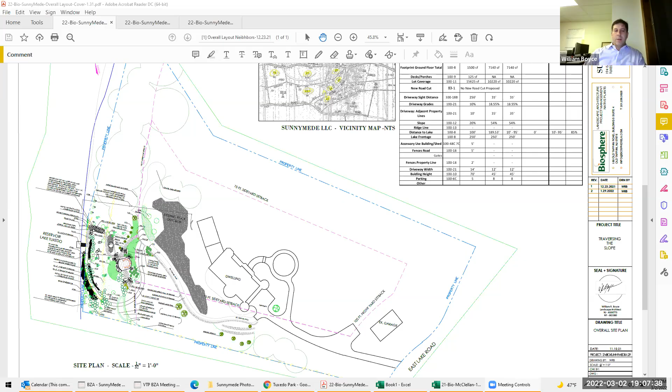I'm a landscape architect working with the applicant. When I was first introduced to the project, the impetus for it was to create a place for the family to get down to the water and experience it in a way that was different from what was there. I was happy to accommodate that goal.

As you know, the site was recently purchased by a new owner. Prior to that, the site was denuded. I heard from neighbors and people in the community feeling as though it was strip mined. I heard that term, I heard denuded - all those pretty much apply. Since the new owner has been there, they've worked to remedy some of those situations. However, there is still one big scar on the landscape, or maybe a few that need attending to.

One in particular is the gravel pathway that extends within the riparian buffer all the way down to their dock - that's where I'm pointing now. The objective is to provide access to the homeowners in a way that's safer. That's a kind of gravelly slope that doesn't feel comfortable walking on, while simultaneously restoring the riparian buffer, which is very important to water quality within Lake Tuxedo.

There's a few strategies we'd like to use to accomplish that. One would be to remove all of that gravel and loose aggregate that's in the area and very erosive. Two would be to pull back and make the existing riprap in that area less linear so that it fits the visual mosaic of what is there, and then plant lots and lots of plants.

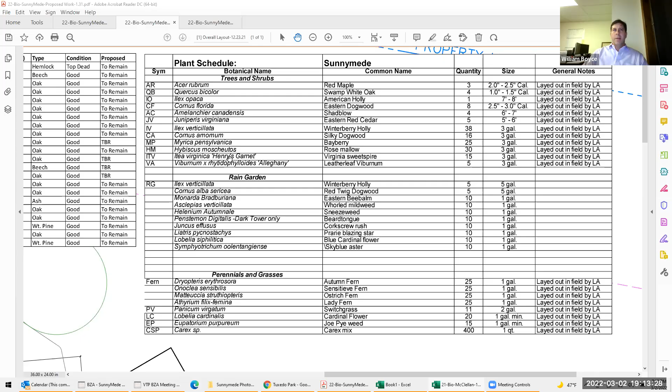And then throughout the riparian buffer, there are another 546 smaller ferns, switchgrass, cardinal flower, Joe Pye weed, and carex. They're all native. They all will work beautifully within what's there now, woven into the existing plant material.

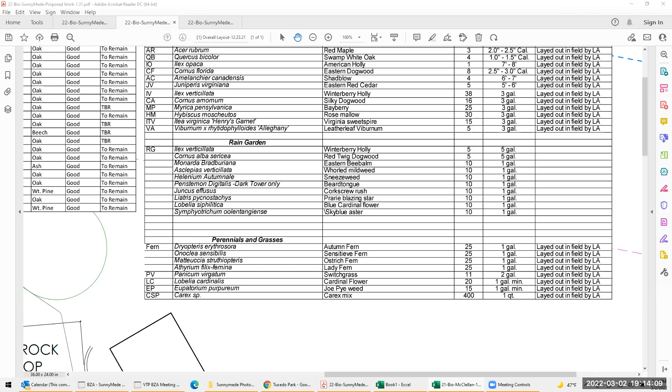The moss that's there now, we would not be interrupting any of that, only adding to it in small pockets by hand, so as to increase the biodiversity within that buffer, which will filter the water. Right now, if I could bring a photograph in, I could show you what the site conditions look like firsthand.

Just please bear with me. I want to grab the correct photograph.

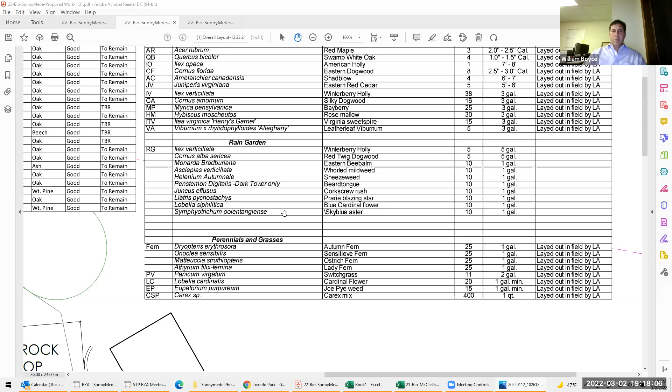Let's see, I'm going to zoom out a little bit so we can see more of the plan, and then I'll open it up to everybody.

Of course, we would be using erosion control measures to make sure the water is protected during the course of the work, and can even retain those measures as long as necessary until we know erosion is not going to happen. There's tree planting details and landscape restoration notes.

This is the actual plan itself. Oops, too big, I want to make it smaller. There are far fewer trees being removed in our revised drawings than there had been in the previous submission.

Now we're only looking to provide a small view out from this area of the lake so we can enjoy it.

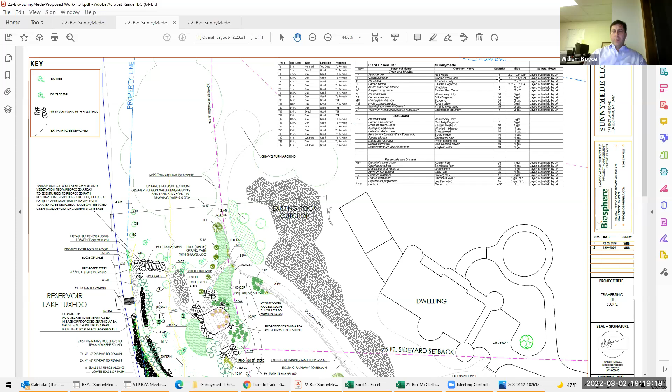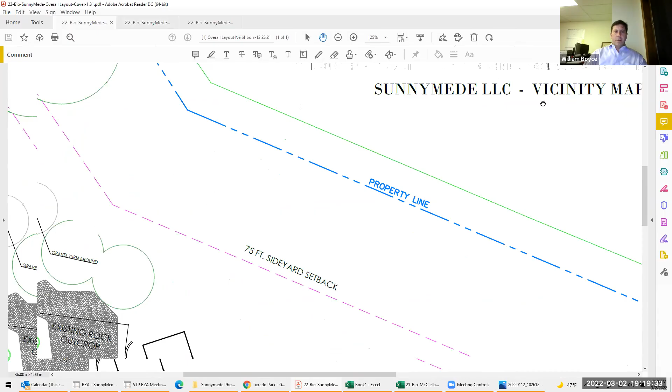Additionally, those trees that would be lost would be compensated for by our 154-some-odd native plants that would include oaks, because we do know how important oaks are. Your board pointed that out, and we're respectful of that. We want to definitely accommodate the needs of the board and nature. And I agree, oaks are amazing and very important. As a landscape architect, that's what I do.

That concludes my initial presentation. I'm sure there will be questions, so I leave it to the board to further the conversation. Elise, we should open it up to the public at this point.

Yes, you can open it to the public, or you can open it to your board and then open it to the public. Why don't we have the board at least ask a couple questions at this point, and then we'll open it up to the public.

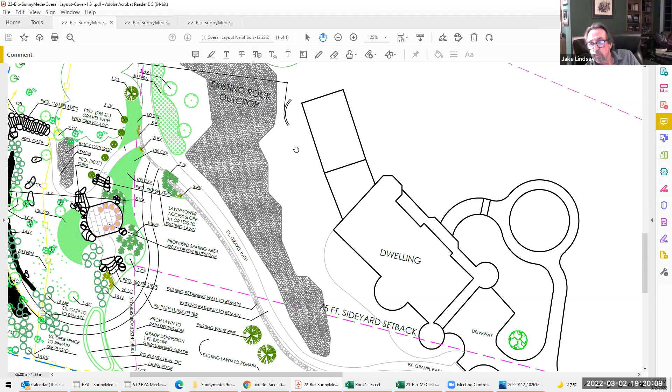Bill, William, one of the... you have the note here about the riprap to remain, which is actually very unsightly at this point, along the lakeside. Yeah, in testimony I said we would be mixing that up and kind of pulling it out. We're not opposed to pulling it out.

I just don't want to do more damage to the plants that are kind of restoring themselves in and around that. I'm sure there's a pretty careful way where we can fix that, but I don't want to create an erosive condition on that steep slope.

We do have 546 perennials to plant in that area, so as we take out the pathway, my vision was to pull some of that riprap around, and I can renote that. Right, because right now, quite frankly, when you look at it from the lake, it looks like a wall. Yeah, again, we don't want that. That's something I want to fix.

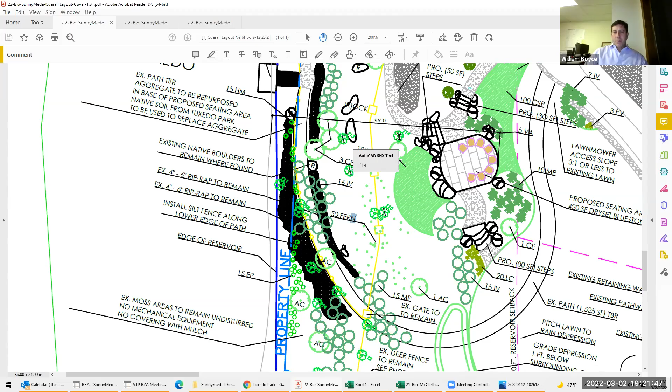I guess you should maybe just point out the trees you are looking to remove and the size of them for everybody's benefit. I'll do that - the trees with the X's, such as this one, this one, this one, and then I'll refer to the list. Okay, there's four.

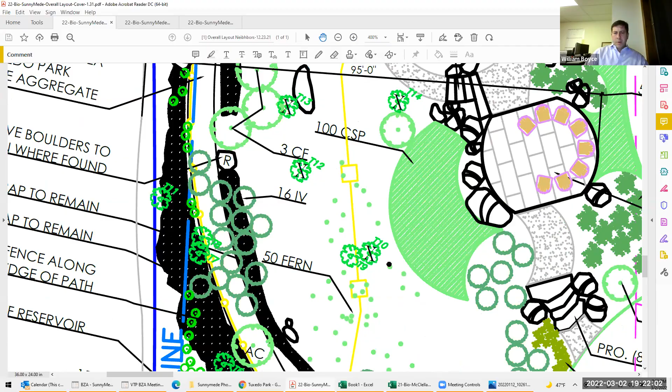They're right here in the middle - 1, 2, 3, 4. Those are noted as T10, T12, T14, and where did the other one go? T13. So T10, 12, 13, and 14. I can refer to the existing tree schedule to point those out.

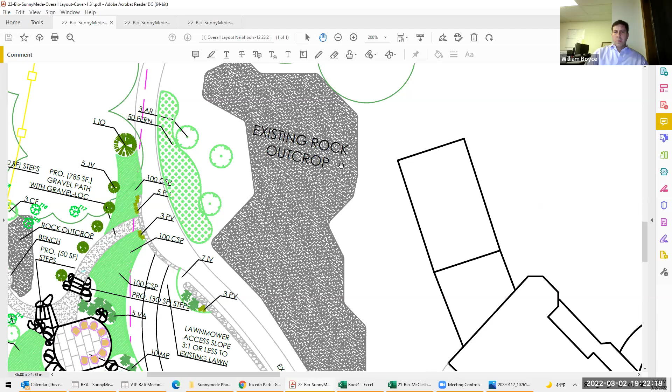Can you also pull the photo that shows those trees? I will be happy to do that. I think my tree schedule is on my other plan.

So T10 is a 14-inch oak. T12 is a 14-inch oak. T13 is a 13-inch beech. T14 is a 19-inch oak.

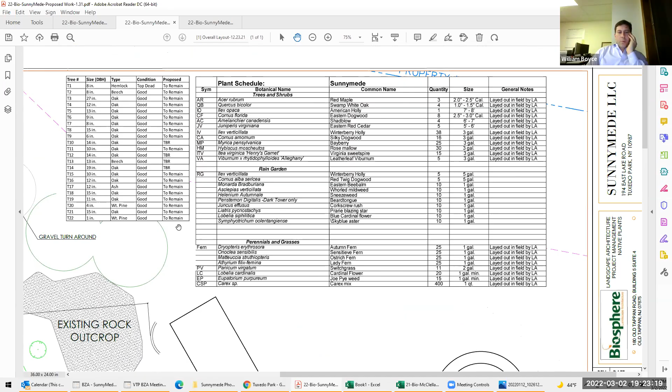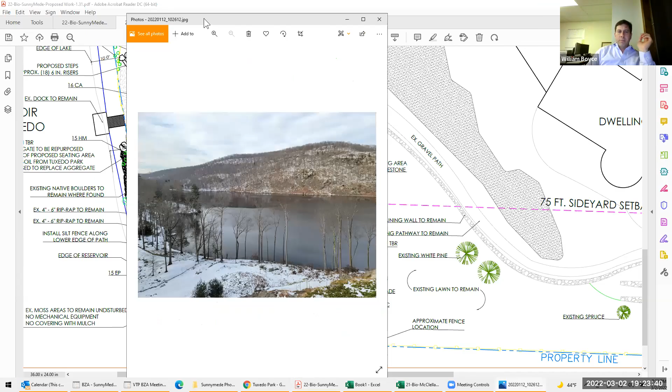Okay, so now I can show you the photograph to illustrate that. I want to expand it. There we go - those trees are right in this area here. So remaining would be all the trees along here, and then all of these trees here. So it's really these 4 right here. And then again, there would be an understory shrub and tree layer complementing the balance of the site.

The other question I have is the existing path that comes down from the home, your existing gravel path - a lot of that falls outside of the 100-foot setback. I guess that's part of it that's in there right now, correct? Yeah, this path falls entirely outside of the setback. In fact, if you can see where my cursor is, right around here, this is all disturbed land, which my plan doesn't really capture accurately.

Yeah, that's exactly what my question was going to be. Quite frankly, I think if we're looking to restore, that area would need to be addressed also.

Yeah, if it's okay, I'll switch back to my plan and try to show you where that is in 2D. I have 3 screens and I'm using all of them right now, so bear with me, I'm doing my best. That area is right around here, if you can see where my cursor is.

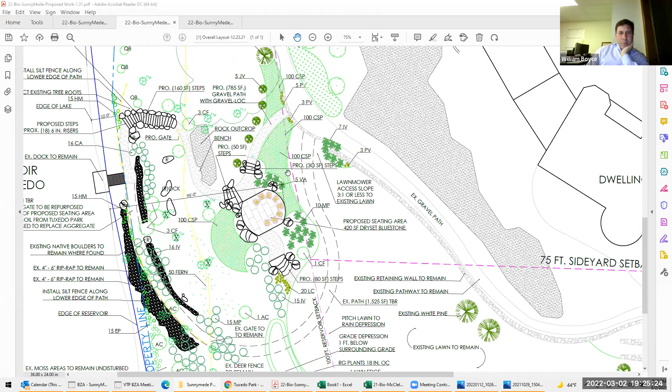So our intention with that area is to come down the gravel path, which we're looking to secure, and that again is outside of the buffer. The buffer is this magenta line. Eliminate this cinder path that goes around, outside the buffer and then in the buffer, and add a lawn within this space here.

And then that lawn would be non-erosive. These are carex pennsylvanica, all native, low-growing plants. They're like small grasses that are semi-evergreen. They would be through there. And then Juniperus virginiana, which is native juniper - it's the tree form of a juniper, and they attract wildlife and are great for the environment all around.

So yes, we would be restoring that area that's in the photograph, and then the area also that would be outside the 100-foot too, where you have the note 'lawnmower access slope 1 on 3 or less.' That area where that note is is also a very visually bad area.

Yes, I think this picture kind of hints at that. We have our friend the Japanese knotweed here, so that needs to be removed. This rock would stay, but really from this rock wrapping all the way around, all of that would be improved and planted - it would either be lawn or plants. I have plants along the edge.

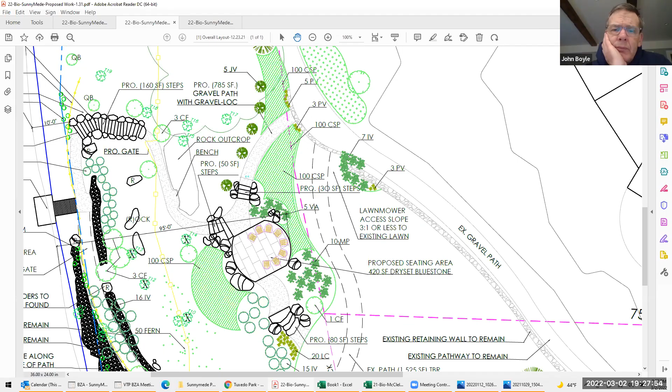I guess the question I have is where you currently have the note 'lawnmower access slope' - is that all currently just a rock outcropping, or is there an ability to add vegetation there as well? Yeah, there's just one big rock there, right here.

Right in this area? Actually to the right of that. Above the path - right in this area? Keep going to your right. This area in here? It's all kind of barren and looks like a strip mine. Yeah, actually I have addressed that to some extent - I'll show you where I have 50 ferns going in there, kind of in and around.

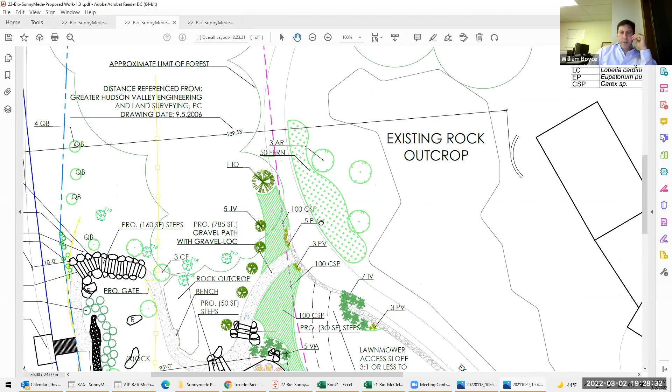Below that, you see where it says lawnmower access? Right here, keep going down. Yeah, that area in there, is that all rock, or is there an ability to add vegetation in there as well? Sorry, I just had a visitor. Yes, whatever is not lawn would be plants, and that whole area is intended to be restored.

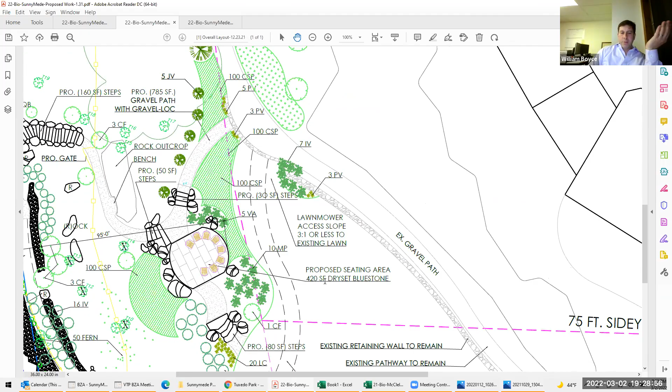Okay, well that should be shown on the drawing then also. Yeah, that's not a problem - that's existing lawn to remain. I can just put a note: existing terrible lawn to be improved, or something of that nature.

Before we give it to the public, this should have had a topo to go along with it. Do you have the topo? Because you're pretty steep access here, and when you look at it, it's hard to tell whether some of the steps are going up or down, or what the percentage of slope is in those particular areas.

I agree, I would have loved to have had the benefit of a topo on it. I've been a design build firm for 25 years, and in my experience oftentimes we don't have topo. All of these risers are 6 inches, and I can pull a string level from here and do it based on spot elevations. I really just want to weave it into the existing slope, and I know that won't be a problem for us.

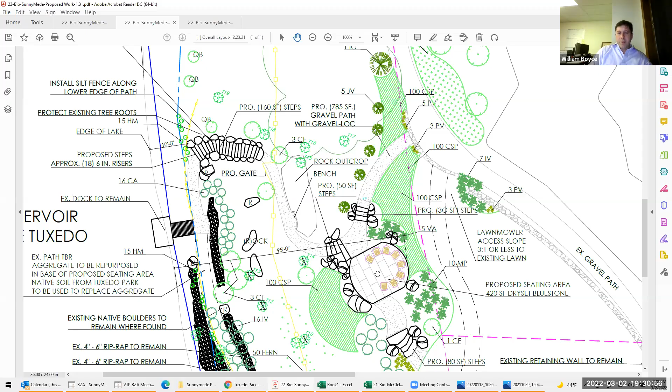So I understand, but we're kind of novices sometimes, and we really need to see where the slopes are. I understand.

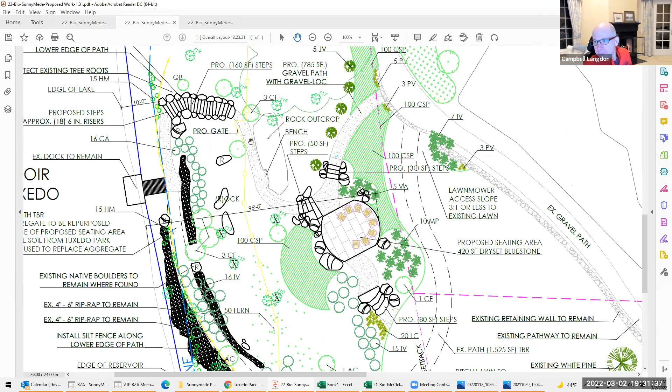It's a horrible color and I did a terrible job illustrating this, but this proposed gate is in yellow. When I draw, for the board's edification, my whole screen is black, so yellow really stands out against the black and white. I apologize for that, and then it says here the existing gate to remain.

That was just during the course of the work. I can easily just show that to be a small gate, but I think we would prefer to have access here to maintain this, and access here as well. It'll be much more convenient to get in there. Not that we're planning on funneling people through, but to maintain the plants would be helpful. I think their neighbor may also have a gate over here, which I believe they're friends, so it might help.

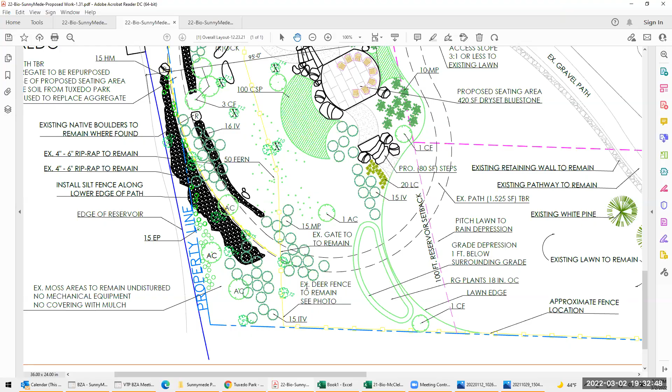Jake, do you think it'd be helpful to show that photo that you had? I sent it over to John. Could John show it? Yes, I can. Because that kind of gives you a sense of the elevation, I think.

Can you blow it up, John? What section do you want to look at? Just have it be the whole screen. Even if you just get the whole screen, right now you've got your downloads on it. Is that what you see? Yeah, I see half a picture and then the downloads. Hold on a second, let me see if I can open it first.

Where is it? Nice sweatshirt, John. Well, we coordinate, we'll have to call each other again to get a different sweatshirt next time. That better? Yeah, you got it. Much better, there you go.

Maybe William, you can just point out where the patio is going and where that barrier is. I wish I had that ability. Can you? How do we do this? Because John shared his screen, he's got control of it, I guess. William, can you see my cursor? I can, yeah. Okay, all right.

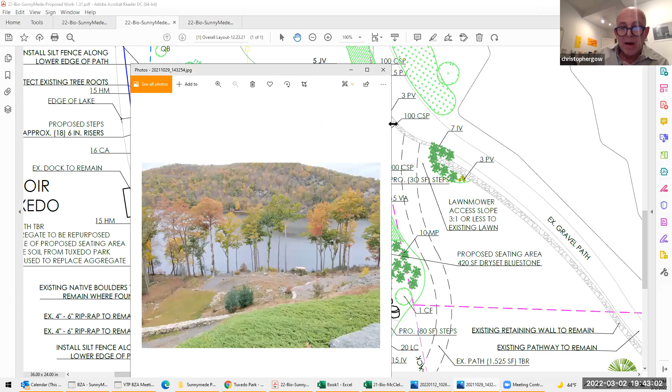From an aesthetic point of view, if we're not looking from the McClellan's side, but looking at the McClellan's from the lake, here's an analogy. It would be, I don't know, as if you're going to a ball and you've got your beautiful diamonds, your earrings and necklace and all your family jewels, and you forgot to put your tiara on, or you've thrown the tiara out. That beautiful canopy of trees above you would be missing. So there's this sort of platform, like the top of an Aztec ziggurat.

You'll be sitting completely exposed to all of us on the lake, yourself completely exposed to the sun, because you won't be sitting there when it's not sunny, and those trees will be providing you lovely shade. Otherwise it's going to get very hot there. So I really, really would implore that you keep those trees, especially the 19-inch oak tree, the T14 tree, which is quite near the patio, and that would be the one that would provide you with some shade.

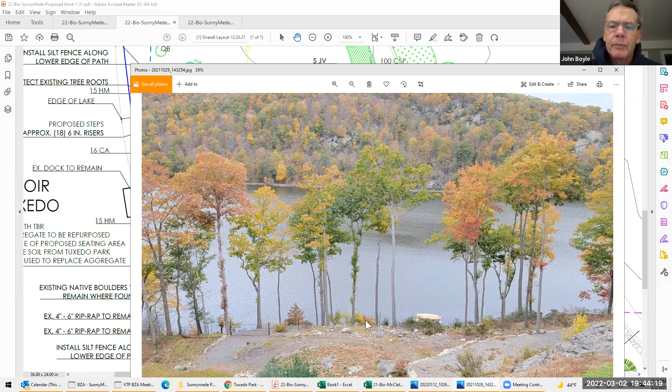Could you point out to me again which 4 trees we're talking about, William, please? On the plan view or this photo? Right, we're looking at right now. Yeah, these 4 here. Okay.

So if we analyze these 4 trees, and Christopher, thank you for that, I do appreciate it, and I do appreciate trees as well, as we all know. These 4 in particular, this one's displaying suckering branching, as Mr. Gow indicated, they have been stripped of their lower branches.

Of course, the loss of any tree is not necessarily the greatest thing, but I know the applicant has made it clear that they really, really like the water, and they are restoring the whole ground plane with copious other plants, all native, really looking to create more of a layered effect and feel as though that would be compensation. I think the shade they would be benefiting from those trees might hit at a certain time of day, but I think most of the day, given the elevated canopy, it's not going to be as wonderful as we would love.

I know that the last time we presented, I think there were 10 or 11 trees to be removed, but after really analyzing what the owner wants, they really want an uninterrupted view of the lake from that one spot. So we worked with them to refine the expectation there, and it's hard to keep those trees in that spot because they just see more water in a contiguous view. That's the position I'm in.

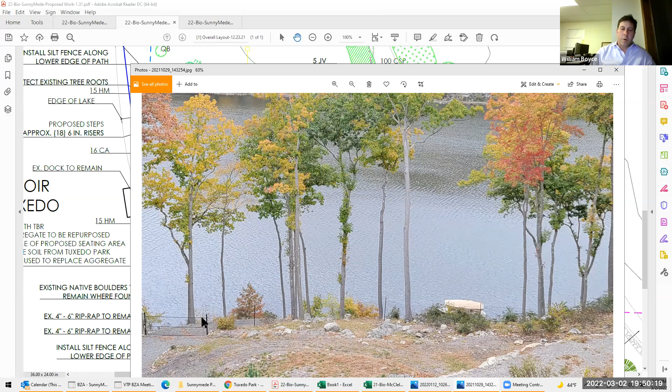I do also know that lawns have a high runoff coefficient, especially if it's compacted soil below the grass. But in restoring the site, we would make sure that the upper layer, the O horizon of soil, would have lots of organic matter in it. It would be spongy because then we wouldn't have to water it every day. And that too would absorb as much water as possible for lawn to absorb. Our view is that the rain garden depression would capture additional runoff that was flowing into the restored area. It was our intent to do that based on comments we had received from the Architectural Review Board. And so that would further enhance it. And it kind of works as a funnel because everything goes in that direction as it is.

In that direction, we would plant lots of plants. I think there were 90 perennials in there and woodies that would suck up all the water before it got to the reservoir. Furthermore, we're not increasing any lawn, we're actually probably maintaining about the same. And what is not lawn now is erosive gravel and small particles like cinder. So that would be removed, which is, as you pointed out, very erosive. So I think our application is extremely sensitive to the nature and to restoring and enhancing the buffer. And I do appreciate no more lawns. In fact, I'm known for taking out lawns and adding meadows, and that's what we want to do here as well, hence all the plants. Thank you.

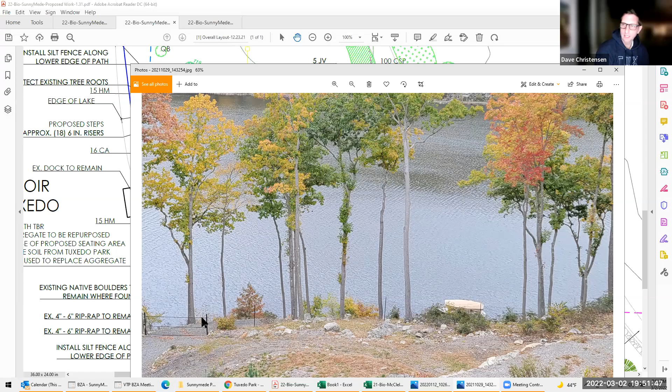John, I have a question on the code. So the code says construction proposed within 100 feet of Tuxedo Lake. Is there a definition of construction in the code? My interpretation, and I would love maybe Mr. Ledwith to refine my interpretation of it, is that it's very vague and it just refers to all construction.

When we first endeavored to do this, we noticed there were a lot of neighbors with dry set construction right along the water, and I have many pictures of that construction. A lot of it's dry set. So I figured since there's no permanent foundation, it's literally rocks sitting on the soil, it would be permissible because it's not permanent. Having done this for a while, I figured that would be the least invasive type of patio we could make.

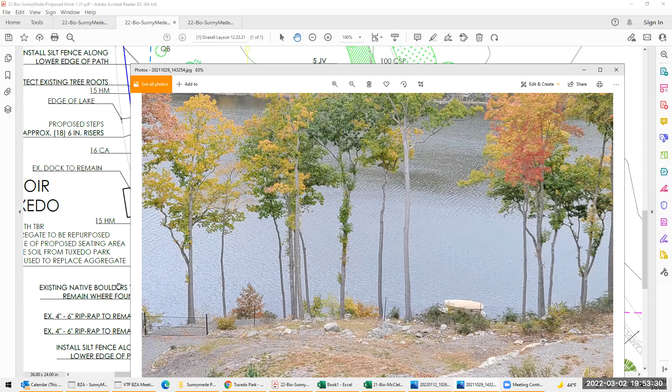I was asking John Ledwith actually, but thanks, William. John, you've mentioned previous meetings about doing something at grade, it doesn't need the same type of variance. Is that correct? Yes, this is construction activity, in my interpretation, within 100 feet of the reservoir. There's also terrain alteration, and it would require a variance within 100 feet of the lake. I do understand the code may be vague in certain points, but I think the code's main prerogative really is to protect the environment and protect the neighbors from activity.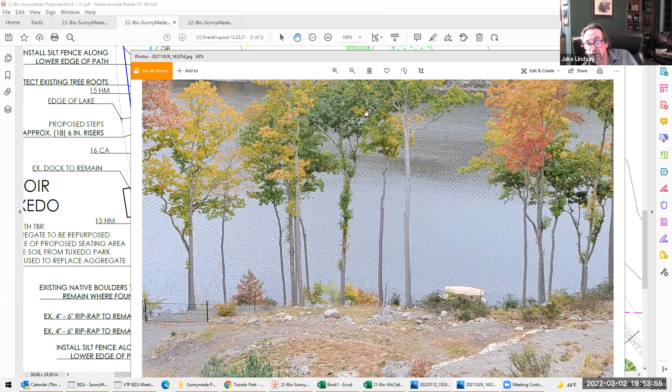Mr. Chairman, may I ask a question? How far from the lake is the patio? What's the closest point of the patio? Well, they don't show that, but obviously the steps would be the closest construction, and that's showing at 10 feet. I would just suggest that they add a measurement from where they want to put the patio as well. Right, they show 10 feet for the start of the steps and the stones around the steps, and they probably should show what the patio is also.

I mean, that's a fairly flat area. It's not natural, so I would think the zoning board would want to consider where it actually is. That's one of the reasons I think we really do need a topo before we finalize things. If you look at the existing property right now, it's just a flat area that has nothing on it. It's eroding, it looks like garbage, and all they're doing is putting stone on top of it. You may consider that construction, but it's just papering over an existing flat area. In fact, it'll be less erosive having this patio than it would where it exists now.

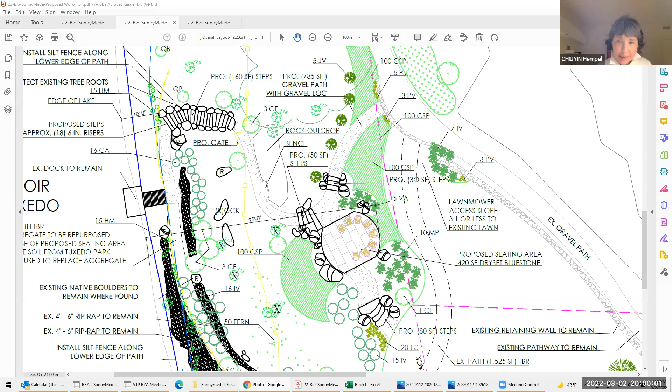To this last point, I'd like to make a distinction between landscaping and construction. I'm delighted that Mr. Boyce and the owner are thinking of planting all those wonderful trees and shrubs and taking remedial measures about that badly constructed path. But the patio is an artificial construct. That to me is construction.

In the absence of definitive statements in Tuxedo Park's law about building within 100 feet of a reservoir, I would hope that the BZA can look very closely at that particular part of the proposal, the patio, because that is construction, that is a structure, that creates more impermeable surface. Even though in the BAR presentation Mr. Boyce said he's going to make it as pervious as possible, and there will be a rain garden and so on.

But I'd like to suggest thinking about the precedent. Mr. Boyce and the Sunnymede owner are environmentally sensitive, but we can't guarantee that everyone else following will be. That's all I have to say. Thank you.

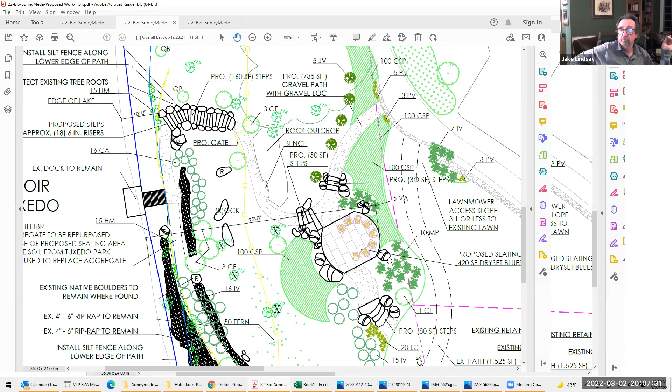So, Jake, where do we go from here in terms of... well, are there any other public comments at this point? I assume not.

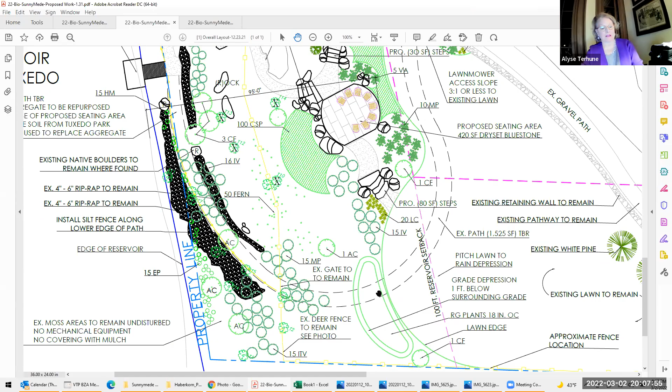Alyse, are you still here, Alyse? Of course. Okay, you weren't coming up on the screen. Yeah, I'm here. I think, Mr. Chairman, if you are going to ask for additional materials from the applicant, you may wish to keep the public hearing open. Do you want to speak?

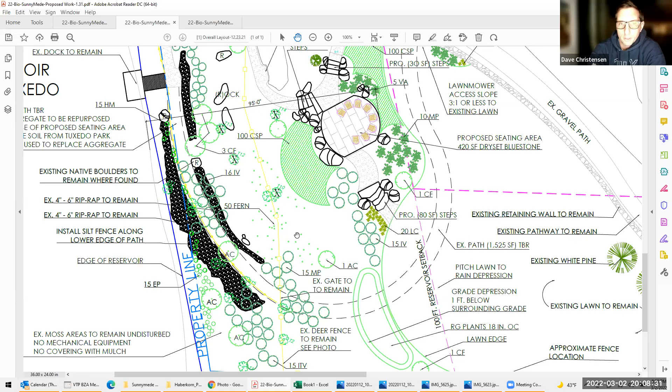Okay, I'd like to make a comment. I appreciate all the environmental concerns, but I do have to agree with the applicant that this is a major improvement to the area. I don't feel that a 420 square foot patio is going to alter the ecology of the lake, the way it's being constructed. I don't think it's going to be an impactful structure. I like this plan much better than the previous one that was put forward. I think they put a lot of effort into it.

Yeah, I would also agree with that. Even with the patio, it's likely to be more environmentally sound than the existing condition today. So it's not just an improvement from a visual perspective, it's an environmental improvement as submitted versus the existing condition today.

Also, Jake, maybe you can clarify this in terms of what our charter really is here as the BZA, as sort of the way I read it. We're approving the steps that they're looking to add, right? And we're approving the patio or not, but what's lawn or not is not in the purview of this board, is that correct? Well, the only consideration is that if we're going to approve construction within the 100-foot setback, we need to take a look at the whole project, and what is its effect in the 100-foot setback.

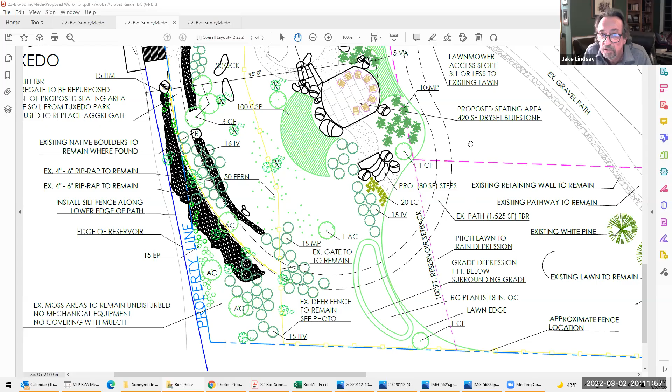Up where the path is, and then to the right of that, where right now the start of your path is, off of your existing gravel path—no, the one that you're removing—there should be similar plantings in that area up to that wall.

And I would like to see a topo, and I would like you to consider saving some of those trees, because you're going to need a big piece of equipment to go down and cut that tree down, and then you're going to need to take out the roots, unless you're going to stump grind it. Actually, if we did take out the trees, I would leave the roots because they'll hold the slope all together. So you would stump grind it then?

Yeah, it wouldn't be an eyesore from the reservoir at all. At most it would be stump ground, or we would dig around it and flush cut, sacrifice a few chainsaw blades. A stump—horrible to hear that—but grinding the stump would be easier and less disruptive. Okay. Yeah, I would prefer to leave the roots in place and stump grind, as you're suggesting.

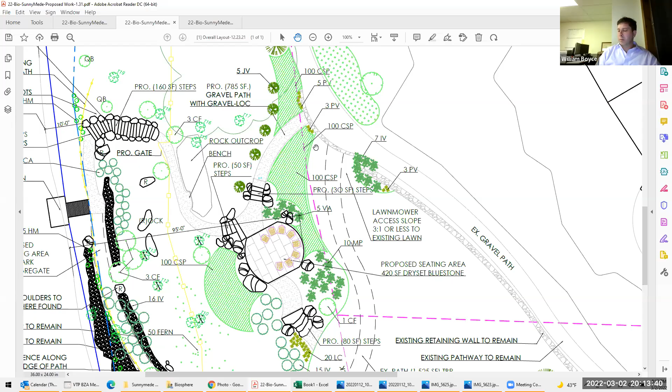I'll just make a comment. With this project, the least disturbance possible—it's already a compromised site, so the least disturbance possible. So removing roots and that sort of thing is just a terrible thing. There is another option as well: a dead tree is called a snag, and some dead trees are more useful than live trees as far as wildlife is concerned.

And so for the McClellans to enjoy this garden, the more trees there are, the more birds there will be, and the more songbirds there'll be. That'll be a wonderful thing to hear as well, as far as the acoustics and aesthetics are concerned.

The other point I wanted to make was, yes, to make an exception for building within this 100 feet, something significant has to give in order to make this an exception. Yes, a small patio is not going to make much difference—it's the principle that's being made here, that we're changing the rule for something. So I appreciate the McClellans and Mr. Boyce putting together this environmentally sound thing.

Because that is the most fundamental thing. The aesthetics are important, but the environmental aspect is the huge deal here, because we don't want a chain link fence put around our reservoir, because too many projects like this have happened by the lakeside, and the DEC sees that we're compromising our drinking water. So it's great that the McClellans are making environmental leaps in the right direction, so there has to be a net gain in this, and there has to be a good example to make up for all the other neighbors that got away with it in the past and made our lake look like Greenwood Lake as opposed to Tuxedo Park.

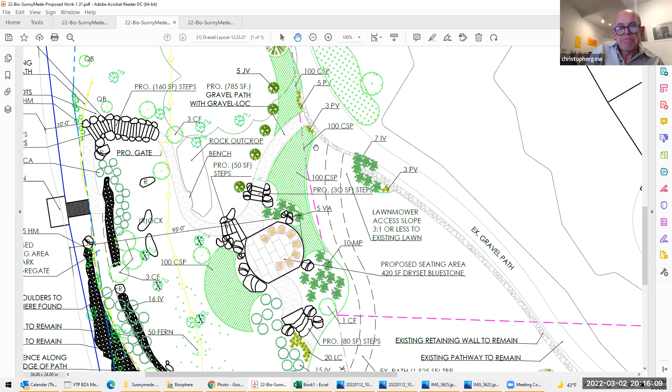This, with the boulders and the steps, is going to look more aesthetically like an Adirondack Lake as opposed to Greenwood Lake. And I think we all agree that's why we're here. So the least suburban it looks, the least messed around with, the better. That's all I wanted to say. Thank you.

I personally would like to see more information and more on the drawings before I would be in a position to vote on it. And I kind of expressed the fact that I think a topo would be required.

I think additional— What? We have one. There was an old topography report done on the property, which is what we used when we submitted for the pool. Okay, but we don't have that in front of us. Well, when we submitted— And it should be, it wasn't requested. Well—

It just seems like a lot of stuff comes up, but I'm requesting it, as far as for us to really review this, and I think the topo should be required. Every other one that I've heard, a month ago when we turned this in. I'm going to look for the topo, and he's going to pull it up. And I don't know how these steps would be worse than somebody putting in a brand new boathouse on the lake.

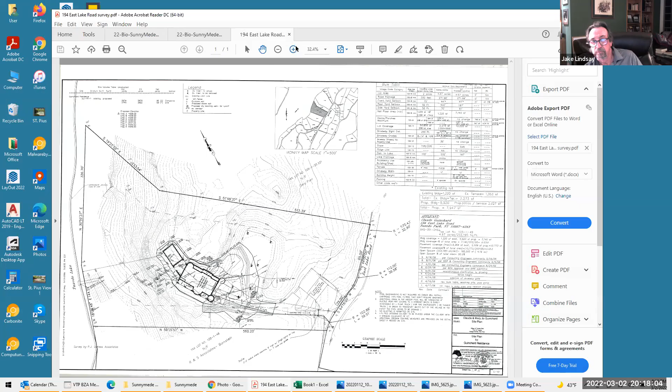Well, a boathouse on the lake, approved. If you're bringing in things, the boathouse is carried over from an old code. People who had a boathouse on their property at a certain point in time are allowed to build a boathouse, it's part of the old code. Thank you, Bill, for pulling this up. As of 2008, right?

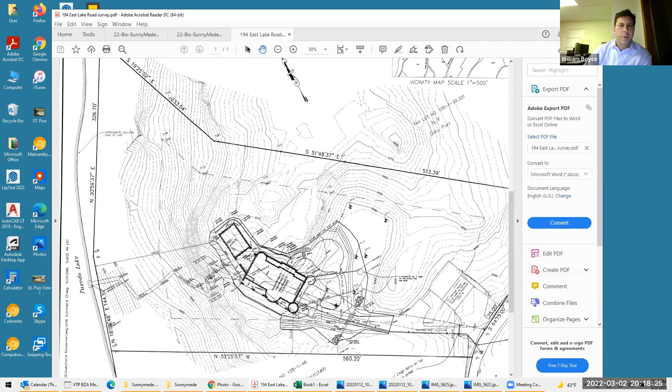Should I check, did somebody see that? This was revised in 2006, I see, but the water elevation probably is the same. Rock outcrops are the same. This is the extent of the topo that we have. Just trying to pan down to... I don't think my computer's happy with me. Okay, that's better. Cliff, that's a cliff. It's steep, the whole thing is steep.

So wherever the contours are close together, it's very steep, as somebody pointed out. So this is really steep. This is where the cliff is up by the house. Since the inception of this plan, there was a road put through here, and I would say the dock is static, that hasn't moved. Has the dock moved? Anyone? No, it has not.

So, no, but honestly, typically the landscape plan should have the topo on it, which shows the location of the patio, shows the location of the stairs, shows where they're coming out. Most of the time we're getting drawings, especially something that needs to be looked at closely, you should have a topo.

Understood. I mean, Bill, you're aware of that. Yeah, I wasn't furnished that information within the area we were working, so thinking that we would be maintaining the existing topography the way it is, with the exception of exactly where we're putting the steps and the patio, which is on the flat area.

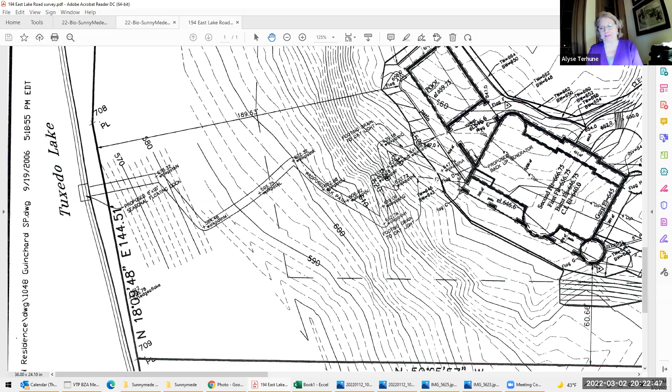So, Jake, does it make sense to have the discussion of the 6 points now, just to see if anything else comes up? We're not voting, we're discussing the points. Other than this topography request and additional planting shown in the other areas, from my perspective, okay - now I'm not sure what other board members feel at this point in time. I'm just trying to find my drawing.

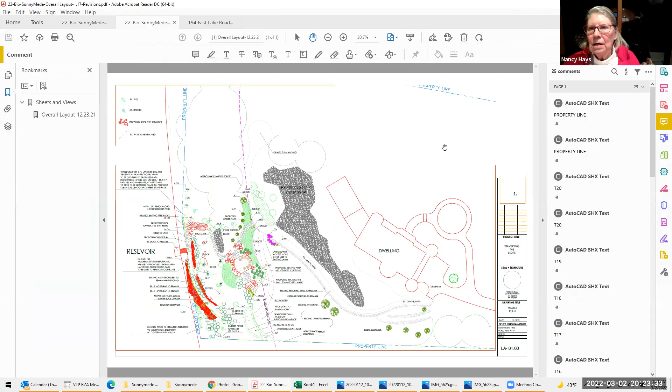I would like to see the topo regarding the stairs, if I can. I was there, I walked it, I'm comfortable with it because I actually saw it, was there, as opposed to seeing something laid out. I'm comfortable. Yeah, I have to agree, I'm comfortable too. I was also at the site today, so I saw it and believe this would be 100% better than the existing site. Well, yes, anything would.

So it sounds like we have 3 members that are supportive. And I would like to see more information. I would like to see the additional plantings and at least spot topography.

I'm pretty quick with AutoCAD. If you could recess for a bathroom break, I can put more plants up there. I'll do it right in front of you. I would just make a point of order here that it is the chairman who calls for the vote.

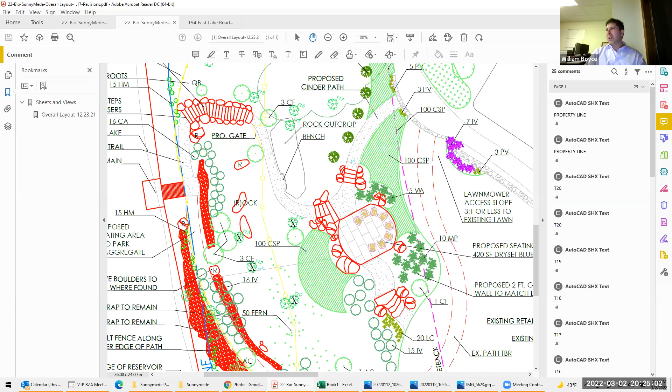Right. Can you put the additional plantings on? Yes, sir. How quick could you do that? I just have to get the right drawing open, if that's okay with the applicant.

Yeah, it's fine. Would you like a sidebar, applicant? I'd whisper to you, but I'm not sure how to do that in this forum. Is it okay if I text you quickly? Yeah, I think you can just chat. Or you could just put it on mute and call her. No, I mean, that would work.

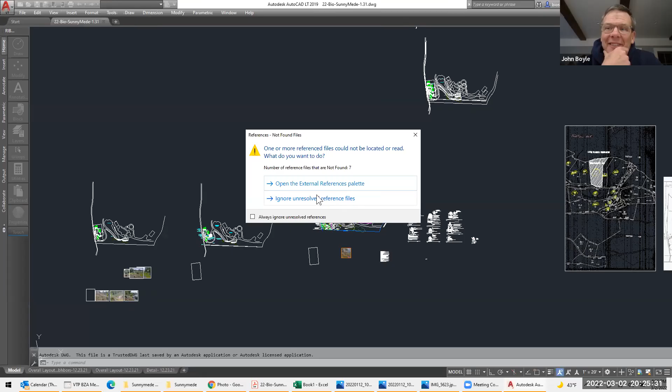Happy to have additional plants. The whole point is the planting down there. My understanding was this meeting was really about the dry laid terrace and the dry laid natural stone. We just need to look at that, not because of the landscaping, but because something is being built in this 100-foot setback, and we need to see the whole concept involved.

And it's all part of it. I mean, obviously, if the fact is that you weren't improving a bad condition, we would probably look at it a little differently. But since we're all tired of looking at it, we can be more agreeable. Yeah.

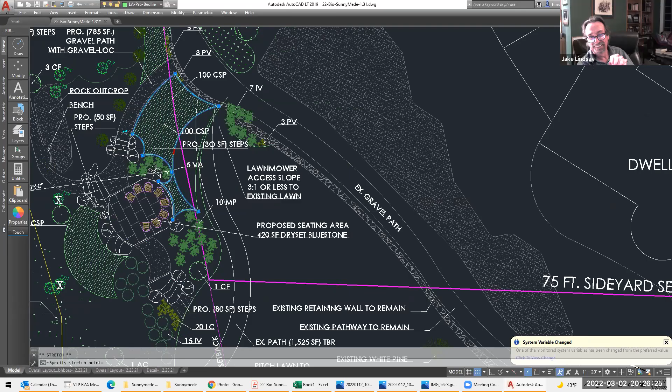Plans? All right, so that's a polyline. I'll change this 100 to 200, raise it to 200 of these Carex. And then go to the area where it says lawnmower access slope, existing lawn.

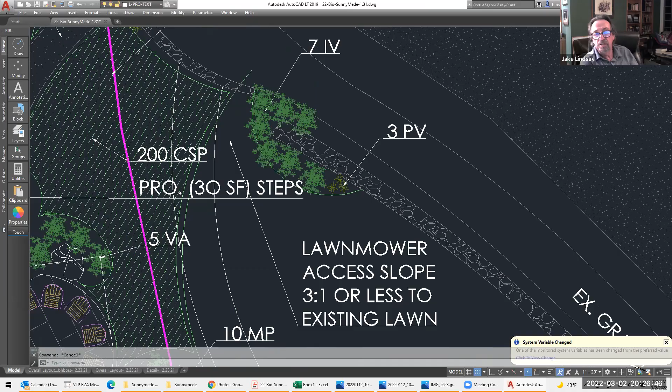If we could go with more ground cover in that area, it would be great. Just want to be able to get the lawnmower in that area, but I could bring that bed over there. Right, and then I could do this, and offset 1 foot, bring that around. While you're doing that, I'm going to step away for one second. Understood.

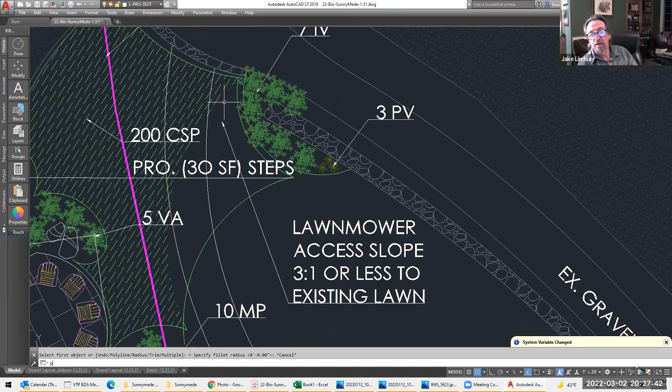Oh, you are muted, it says raise hand. Now, while you're doing that, there's one thing that kind of kicked up about DEC approval.

Now I think that, and Alyse, correct me if I'm wrong, that's not for us. We would need to give this project approval before they could go to DEC to see whether they could get a permit, correct? Well, what would happen is the BAR obviously can't move forward until the zoning board makes a decision. If you grant variance, then they go to the BAR. The BAR's decision would be conditioned on any permits that they might need from the DEC.

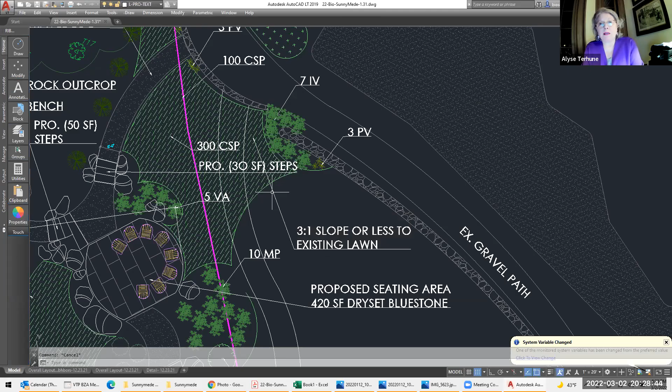Whether they need permits or not, I'm not positive. But if they do, in my experience, the DEC doesn't typically give a permit unless there's an approved plan. Right, did that make sense?

So they would need, number one, the BAR would need approval from the BZA. And then they would take the approval from the BAR if necessary, if a permit is required. Yeah, and I would think that the BAR would find that out.

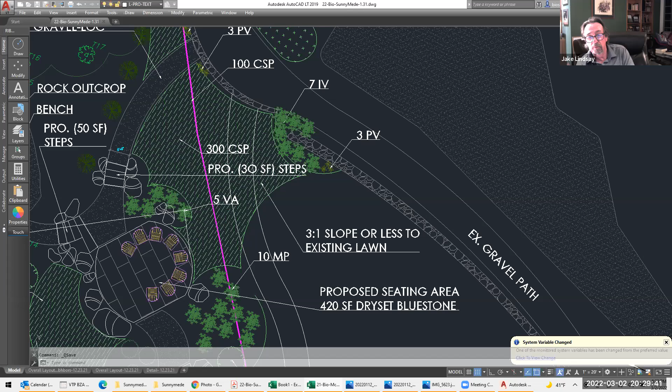Okay, I'm not sure from reading, because I read the regulations that were sent over by the DEC, and it's somewhat ambiguous. And a lot of it has to, quite frankly, do with the slope. And that is one of the reasons that I would look at the topo, because I think the slope is critical to the DEC as far as approval.

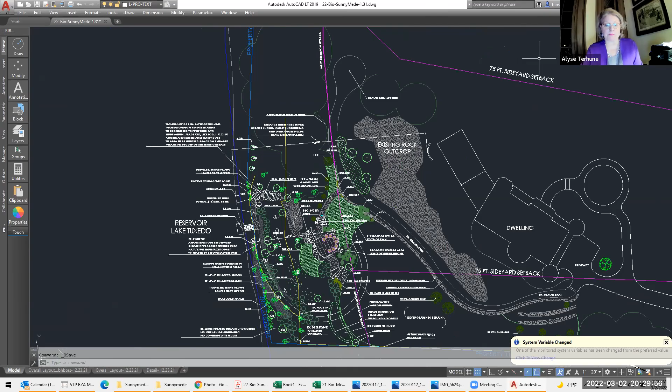Well, certainly the zoning board, at a minimum, could condition on compliance with all state environmental laws. I mean, that's kind of a given, but you could put that in your approval. Okay, any required permits, et cetera.

Well, while he's doing that, do we want to go through the points? Alyse, why don't you take us through the points?

So the first point would be whether granting the variance or variances will produce an undesirable change in the character of the neighborhood. I certainly would say that it would not, and from a landscape sense, it is certainly a great improvement. Anyone else agree or comment? Yeah, I agree. That box is checked.

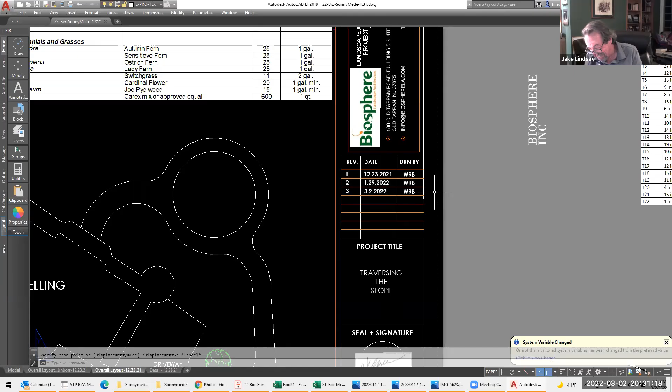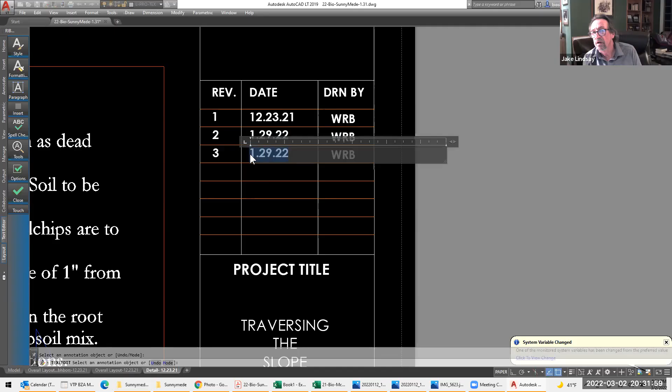Whether the benefits sought by the applicant could be achieved in some other way. They're improving an existing condition, so I don't think it really applies, except for the fact they are adding new things, and yes, that could be done another way, but the steps really would be required. Are there currently steps? They got around the steps right now because they swung that path all the way around and did it on a gradual basis to eliminate the requirement for steps. Exactly, but we found that that's more erosive because it's kind of steep, so by adding the steps we're reducing erosion and making it safer because it's not like cindery, marbly ground.

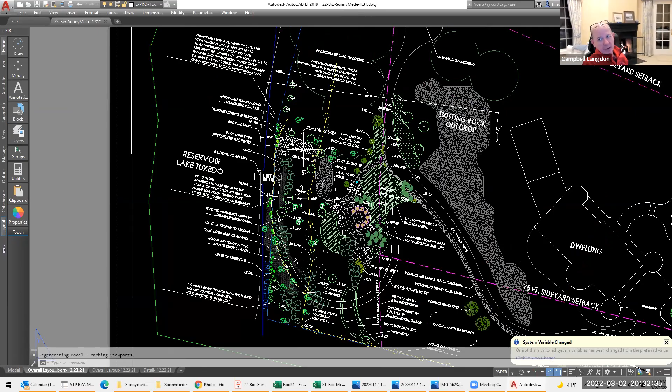Yeah, having been there today, it's not especially safe right now. Well, I was told, so I wanted to go there today, and Sonia told me don't, because it's all iced over. It is iced over, but that's why I went across the lake and took a picture with my cell phone and blew it up on my phone, and it worked just as well. That helps, yeah.

The answer to the question is they want the patio there to facilitate everything they want to do. I do not believe there's any other way for them to do it. So the answer to that point is no.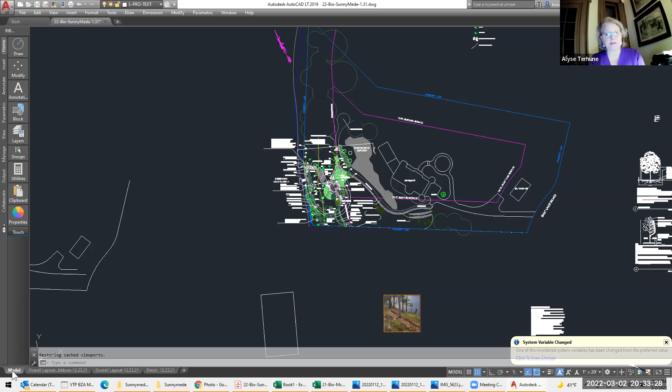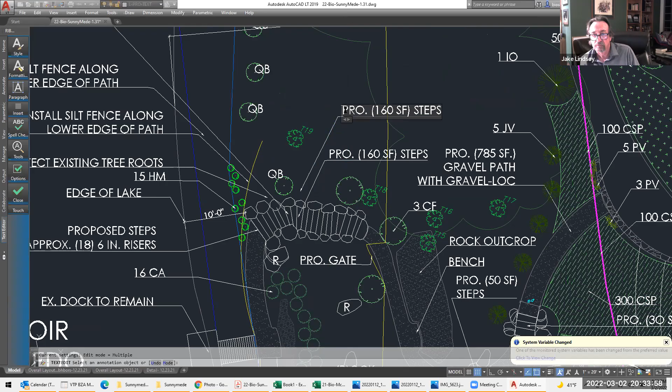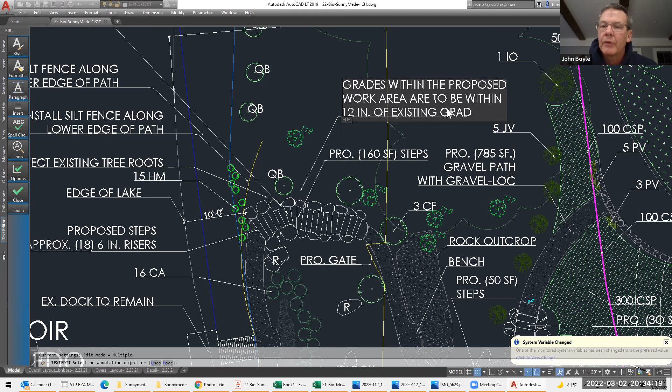Whether the requested variance is substantial. It may be substantial, but that alone would not preclude granting the variance. So how does the board feel about that? Do they feel that it's substantial? I would feel that it's substantial. I don't believe the steps are substantial, but I think the patios may be slightly different. Again, to that point, it does not disqualify this from approval. When you talk about doing something within the 100 feet, that is substantial.

That does not preclude approval, as Alyse said. I guess I view it as they're not constructing a building, right? That would be different. So it's less intrusive? Correct, yeah.

Whether the proposed variance will have an adverse effect or impact on the physical or environmental conditions of the neighborhood or district. In this particular case, it would be an improvement. Yeah, I would say no. Yes, an improvement, so I think that's what we know.

And then the final point is whether the alleged difficulty was self-created. Actually, I don't think it is, because it was a poor condition created by somebody else, and they're trying to fix it. Exactly, I would argue it's created by somebody else and they're actually fixing it.

Okay, those are the 5 factors. Would that be the right response to number 5, Alyse? Yes, it's an existing condition that they're trying to remedy to the greatest extent that they can, so they did not create it. Although you could argue they could leave it alone, right? I mean, all variances are to one degree or another self-created. You could always just do nothing.

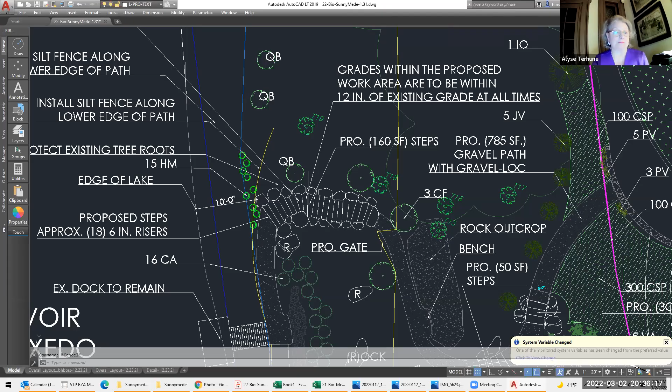All right, William, how are you doing on your AutoCAD? I'm all done, I could send it to print now if you'd like. Why don't you run through it with us then, what changes you made?

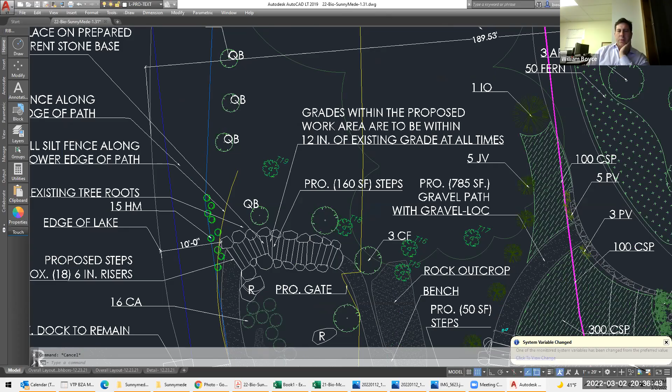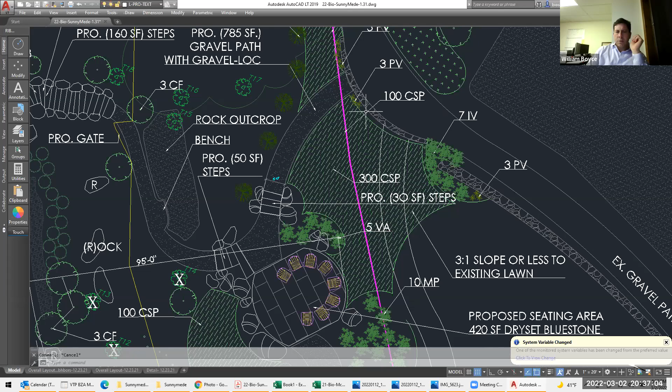All right, I added a note to try to make the grading concept easier to understand. It says grading within the proposed work area is to be within 12 inches of existing grades at all times, which proves that my steps really flow with the landscape and walkway. I'll show you the planting layout. I brought the plants along the entirety of this edge of the gravel and added 300 CSPs. I also updated the plant schedule to reflect that. This is called paper space, which is where I print from.

So the CSPs are Carex speciosa, but then I wrote approved equal. Now I can take the approved equal out, but I don't want to create a monoculture of Carex, and I'm sure Christopher Gow and all the environmentalists, that's fine. We'll leave that up to the BAR as far as arguing about the plants. We just want the area covered. So I covered that.

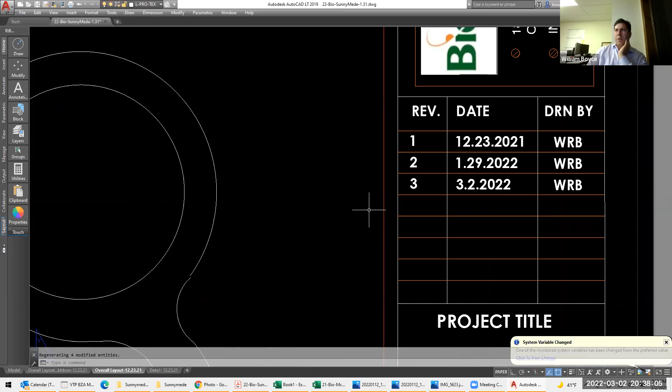I added the note about the grading. I don't think I did anything else except update the date on the drawing to 3/2/22 as the revised date. If that helps for procedural purposes, I can create 3 PDFs of this and send it to Mr. Ledwith at any time you'd like.

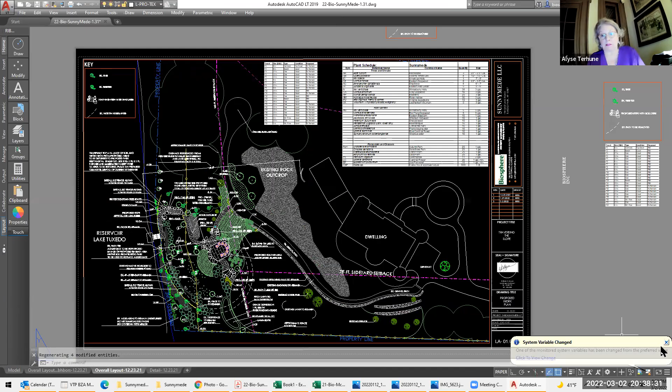Alyse, would that be sufficient before we go? Yes. Any action you take tonight will be based on this plan that the board is being shown now, to be emailed to John immediately, as soon as possible. I've never done this before. I don't think we have either.

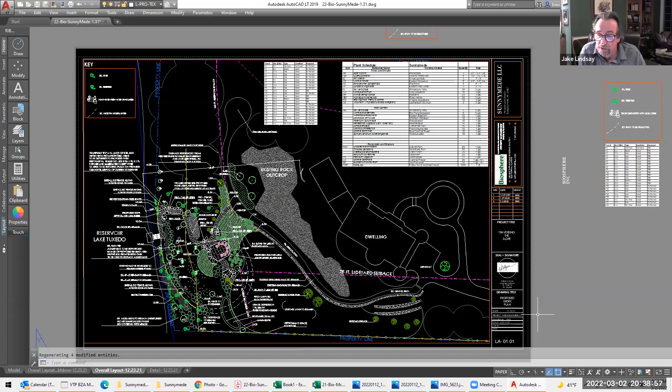Thank you for being so accommodating. I mean, not that we are approved, but in process, this is one for the records. And we're good with this then, right? Yes. As long as you can see exactly what you're approving, then it's okay. Otherwise you're just giving an opinion, you can't really do that. You can't give an advisory vote, is what I'm saying.

Well, the other question I had, Melanie, are you good with this? Yeah, I don't know what CSPs or PVs are. I just hope they're not incredibly expensive and they're very beautiful. The changes are, put it this way, it would save you money by not coming back next month, okay? Thank you, Jake, appreciate it.

I'm assuming at least that we would be ready to vote on this print that we have in front of us, dated 3/2/22. You would close the public hearing and then call for a vote. I'd like to make a motion to close the public hearing. Second. All in favor? Aye. Aye.

I would like to make a motion to vote approval on the drawing that has been revised at 3/2/22, that has been presented to us. Board vote, you need a second? Second. Who seconded it? I did. Dave, is that Dave? I don't see everyone on my screen, so, okay. He's wearing the blue sweatshirt.

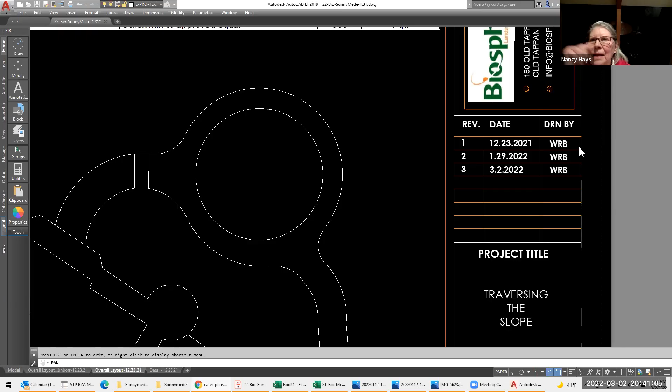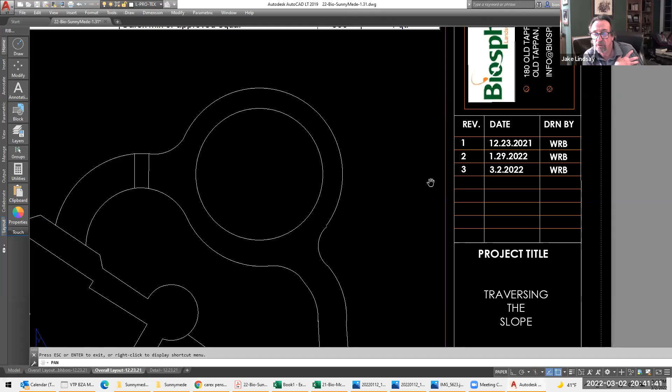Jake, are we voting on both the steps and the patio? Can't we separate them? We could separate them if you'd like to vote separately. That's kind of a bad idea, in my opinion. Honestly, you're looking at, we talked about looking at the plan as a whole. Agreed. We're voting on the plan as shown 3/2, which includes both the steps and the patio, the plantings, the rocks removal, and the stone removal of the existing path, the drawing and cut.

Go around. John, yes. Dave, yes. Campbell, yes. Nancy, no. Jake, yes.

Congratulations, thank you very much. We'll make you proud, don't worry. Thank you, we hope everyone loves it once it's done. Yes, can't wait, very much. And if anybody knows where we can buy some carex, that'd be great. All right, thank you guys, thank you.

And William, you'll send copies of this drawing right away to John? I'm going to send John PDFs of it immediately before I leave the office. And if I did something wrong or spelled something wrong, I'm sure I could send another one tomorrow, if that's procedurally okay. That's okay, any minor correction is fine. I'll take a picture of it, so I have it, so it can't be changed. All right, I can send it to you too if you'd like. Thank you. All right, thank you. Take care. Good.

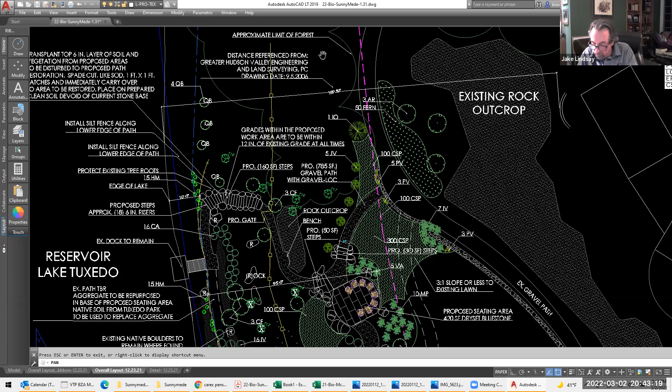Alyse, we have to approve minutes of our meeting of January 5th. Do I have to close? We already closed the public part of the meeting. Well, you only closed the public hearing, you haven't actually closed the meeting, so yes, you can take care of some business now.

I would like to make a motion to approve the minutes to the meeting of January 5th, '22. Second, has anyone had a chance to review them? Yes. Second, second. All in favor? Aye. Aye. Aye.

Do we need to do anything else, or did we approve it, or did we just approve the minutes to the meeting to open the meeting to do it? Did we approve the minutes to the meeting? Yes, you did. Okay, good. Then that's it, okay, bye.